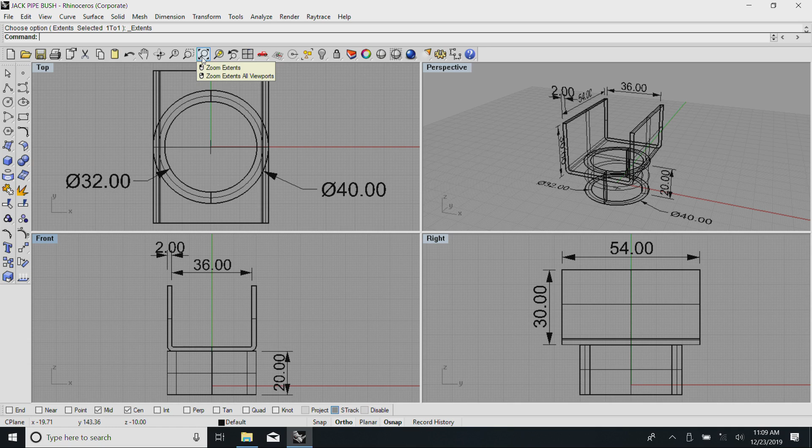that you will notice this probably makes sense only when you are making a very large number of items, where you need to make a blank first of all, which is the developed length. In the earlier lecture, if you remember, I had covered a 30 mm limb here, then a 36 mm limb here and a 30 mm limb here. So approximately a little less than 100 mm, and I started with 50 mm.

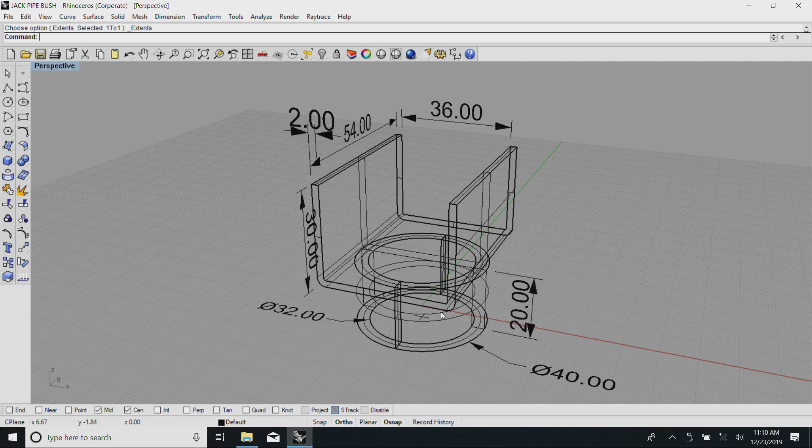So, if you start with a 50 by 100 blank, it is possible for you to form it into this shape, either by using the folding machine, or some other production systems. And at the base you notice that this one is actually a circular portion, probably a pipe. This is typically a 1¼ inch ID pipe at the bottom.

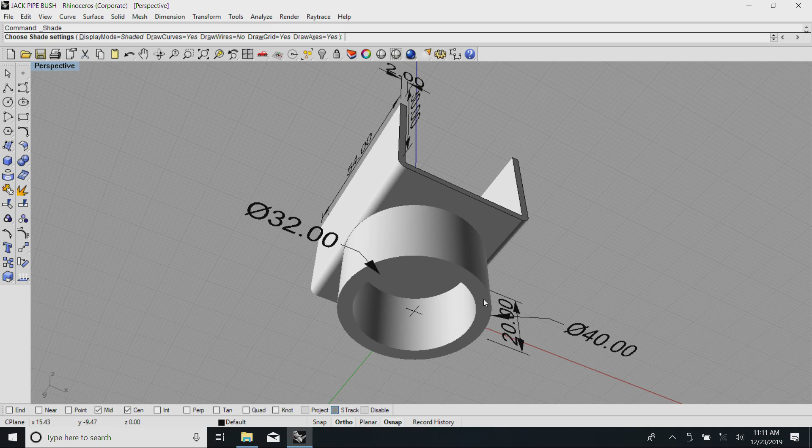That is where these things come into picture. And depending on the type of the gauge, you generally have thick tubes available. So it is possible for us to take one of these hollow tubes and just cut it to length, or alternatively part it. Parting is a way of taking a long tube and making it into small pieces, and then by some mechanism weld these two things together. You just need to weld them here. So, for welding we need a little bit of area.

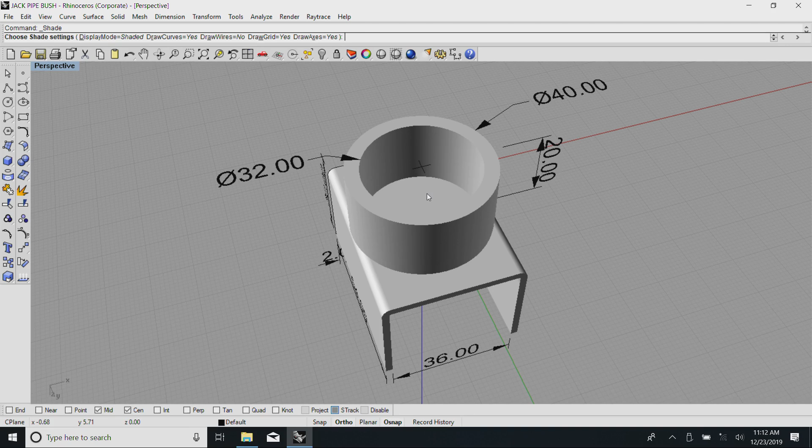Incidentally, my concept was that anything we insert here automatically stops there and still permits you to move things around. And similarly here I can vary the depth as I please without wasting too much material. Similarly, I can vary the width also. Once I do all this, I have a perfect piece which fits on top of the jack, which I am going to come back to and show here.

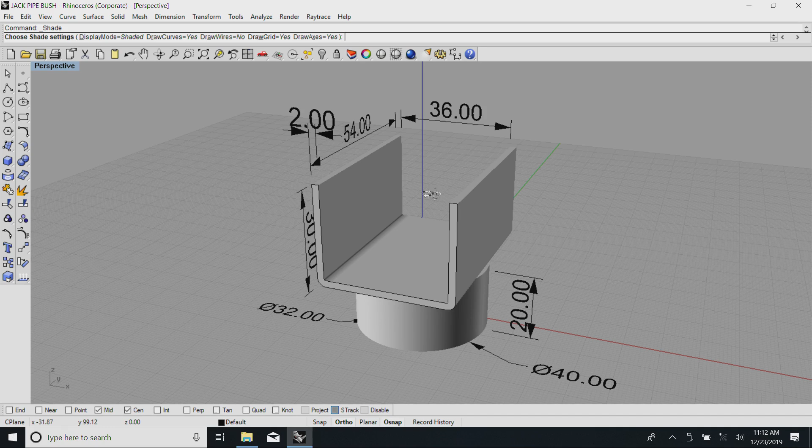However, when we took it to our fabrication facility, one of the things they pointed out was that for a one-off job it is very complicated, and really this does not require this much setting up and looking for materials. Instead, somebody looked at it from the top, and once they did, they found out all we require is a raw material, which is typically a block of

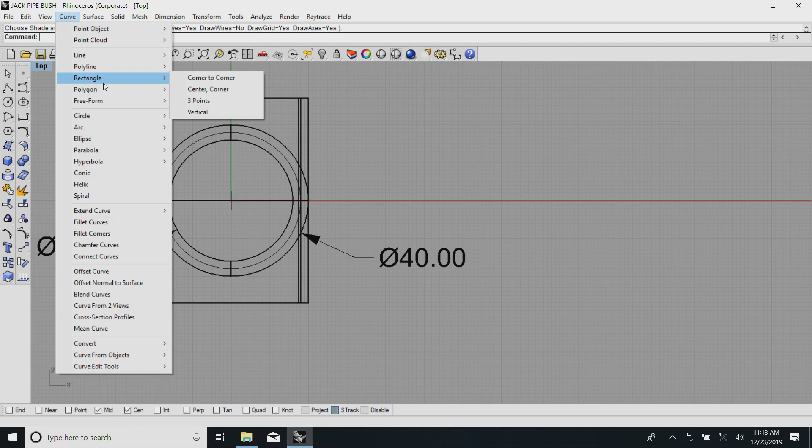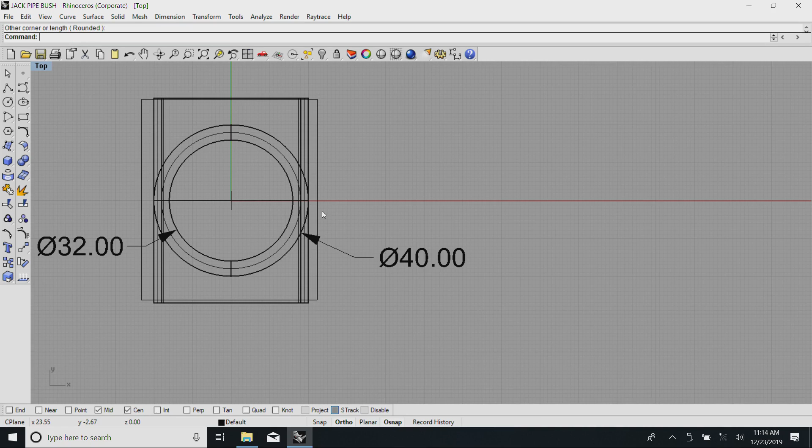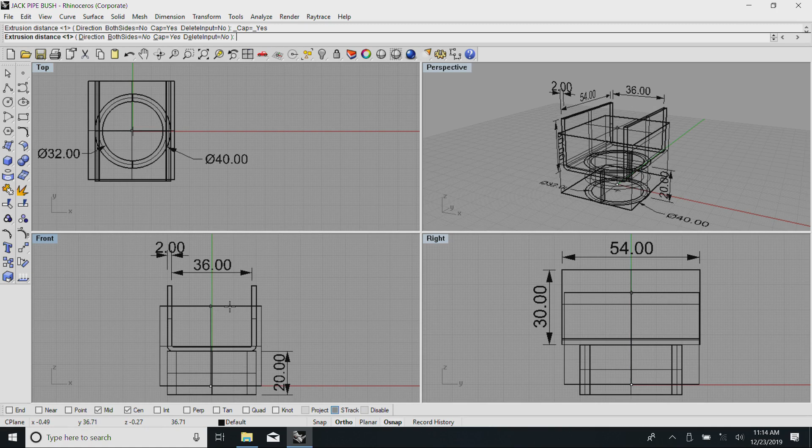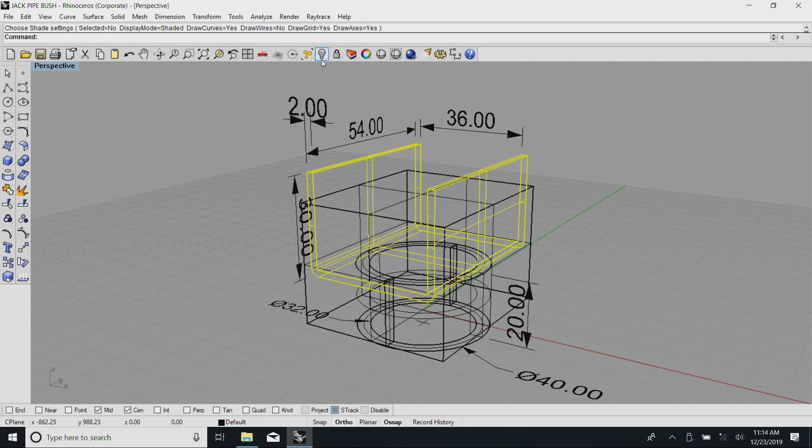so they searched around and found something which typically looks like this here. Now, typically in solid modeling steps, I take a thing like this and extrude it. You see here where I have landed up finally. I just have a solid block, and all I need to do now is forget about the piece which was made earlier, since it is redundant.

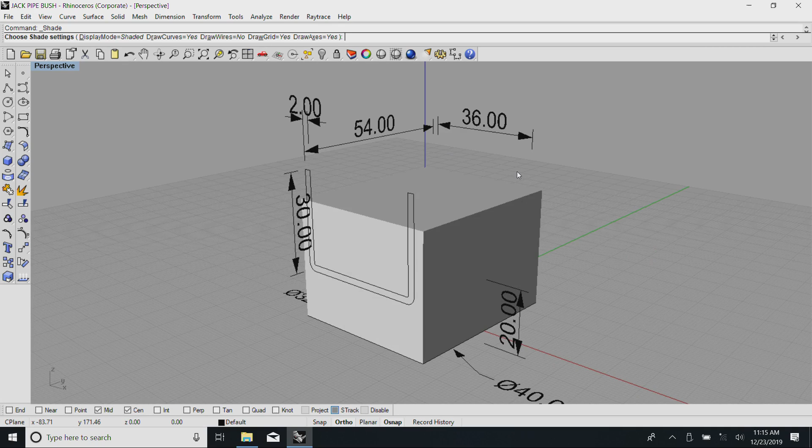I have this nice block. This has been suggested by my colleague in the machine shop, and they said it is very easy: I just take this block, then use the dimensions which I have already supplied. See here, I have a 36 mm groove that needs to be cut through that,

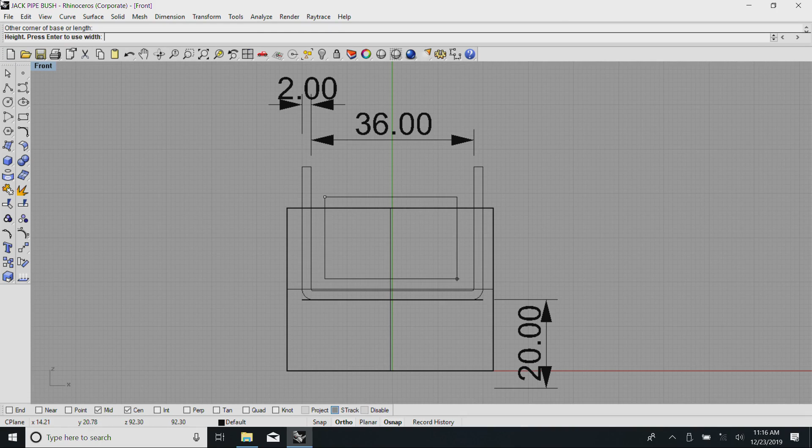and then actually on measurement it has been found that what I assumed would be a 1 3/8 inch chassis member turned out to be actually a little smaller than that. I will measure the thing and show you, finish the job. So, what they have done instead, they have created one beautiful solid; on measurement they found out that the dimensions I have given have a small issue.

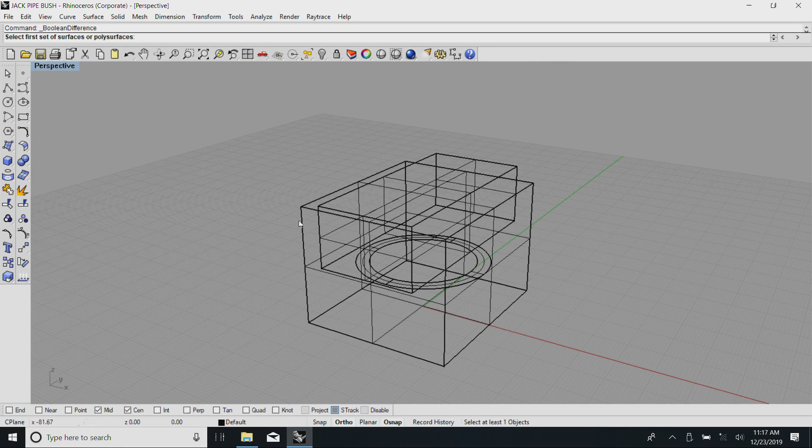You have seen here, I am not making it to scale as of now. I will just show you the operation, which is very similar to what one can do. See, I have made a groove by using a very old shaping machine. Alternatively, I can use a milling machine. Okay, we will just see it here. Take this block and just mill it across like this.

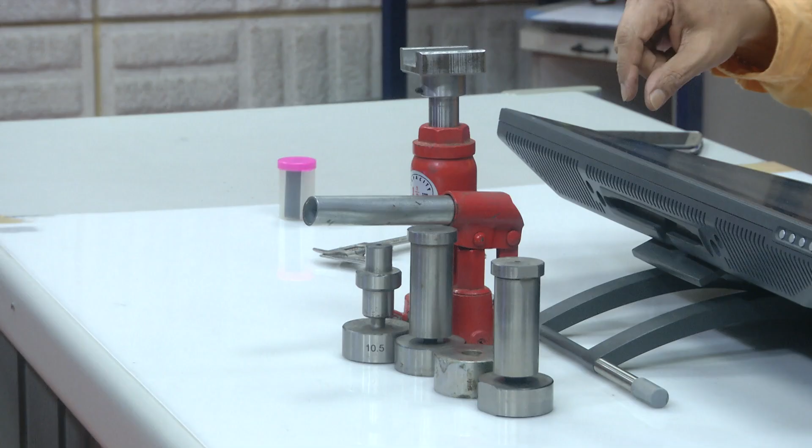Can you see it here? This is the piece which they have made. They have just taken this block which I have shown you there and milled off this portion, and on checking they found out that, considering the stock material and the amount of groove required, something was a shortcoming in my conceptualization: the depth required to prevent it from slipping need not have been so big as I have shown there. So, they checked with all the available milling cutters and passed a milling cutter in about 4 or 5 passes to get the groove.

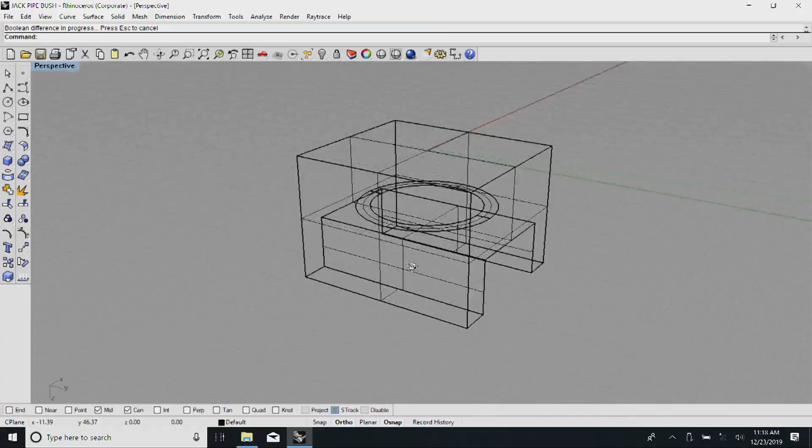I feel it is an extremely brilliant solution to my concept. Now it is my turn; I need to upgrade my drawing to whatever is shown here. Now, coming to the other side, I will just lift it a little. Can you see there is a small hole there, and the hole is part of the very convenient processing that they could do. Now, coming back to my solid model here, I will now turn it over to this other side one more time.

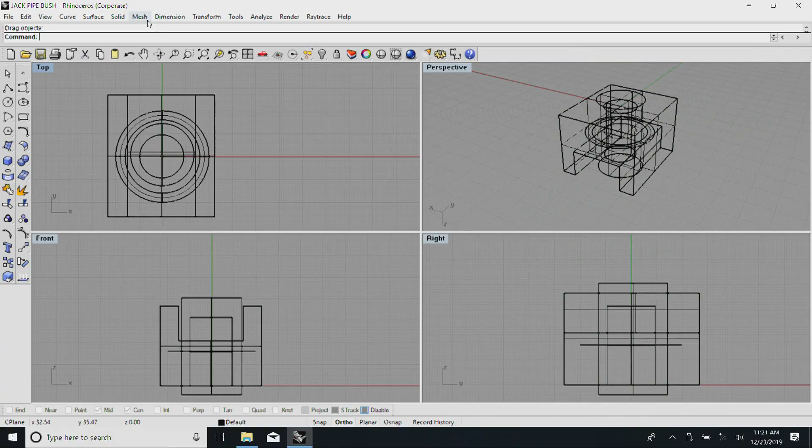I have 2 solids now: one is the block which I started with, and 2 more cylinders which are used to bore a hole or drill a hole through it, depending on the type of machines available. Luckily, they could find a machine which is used for initial operations. So, using that they made a hole here first. If you see the solid here, they drilled a hole through the available material,

using a drill bit which is just about sufficient for it to pass through, but smaller than the plunger of the jack which has to go inside. The advantage of this is, first of all, a lot of closed end mill operation has been avoided, and a drill can easily start with these thick materials. You can fairly easily start with a 6 mm or 8 mm drill, and in the second operation they can drill through the hole. That is how the hole shown there has come about. Now, after this,

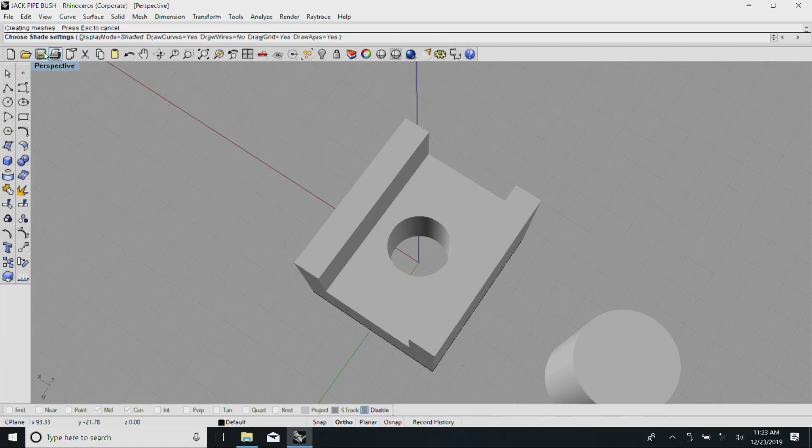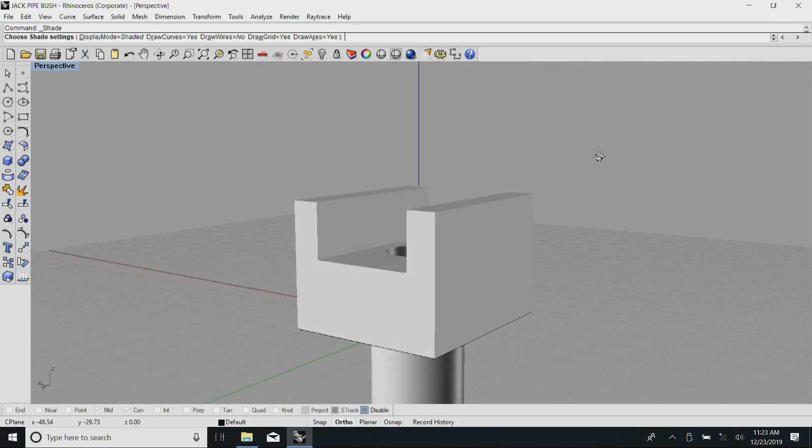see here, this is the second operation which has to be done a little more accurately. You see here, I have my beautiful job ready. Compared to what I started with, this is much easier, and probably, instead of having that sheet metal and one more bush which needs to be parted, I can use this model directly to make a few hundred pieces.

Instead of buying a tube, instead of buying this, since most of these are sold by various weights, I can now optimize it such that making a few other things is much easier and much more convenient at this point. So, you see here I have my job, this is exactly what they could do. It is a far superior design than what I have thought about. I am happy for it, fits perfectly, and there is an automatic stopper.

And overall, while this has been made using a mild steel profile, probably it can be done in a simple non-ferrous gravity casting, and in that case probably no further operation is required, because at this point anything sits here comfortably in it. At this point probably a little bit of passing a drill, which even cleans this hole, is all that is required. A little bit of flash may be there.

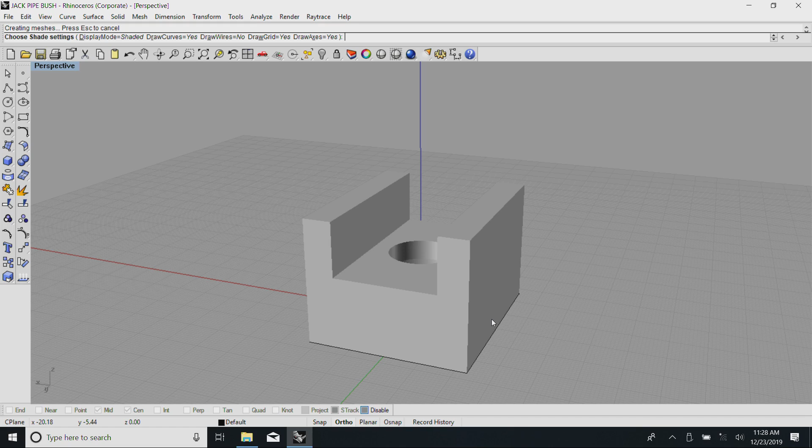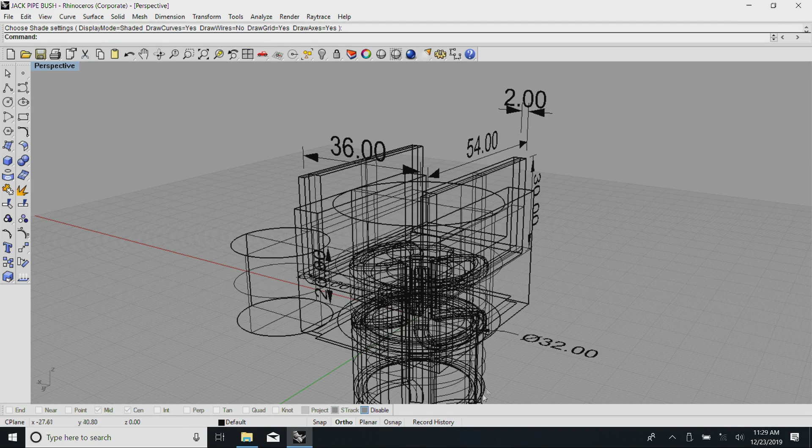If you see that drawing very carefully, I started with whatever you see here, so much of this stuff is still hiding inside. Both of these are sitting one on top of the other. I have so many variants sitting on this. Now, I clean up the whole drawing and we really have two variants of the parts. All possible variants have been worked out here, and it is just very easy for me. All this garbage which I have put is no longer required. I just delete these things which I do not need.

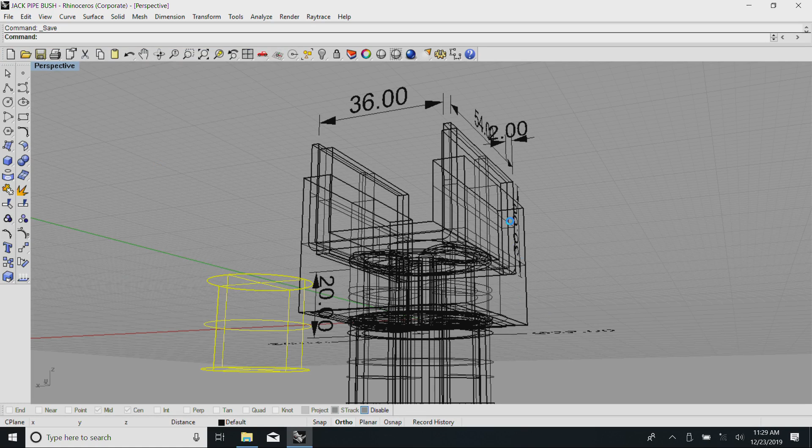Just retain whatever was fabricated in the shop, and so I have two variants of it. One is my concept which I tried to improve marginally, which can always be kept on file, and I have this finally fabricated drawing, which is very easy. So, let us say it is a part of some electric vehicle jack at the bottom, I probably require only one or two of these things. Now comes the further advantage.

If I just carry this along with my toolbox inside the vehicle, most of these jacks already come with standard dimensions. You see here, this is probably a 1-inch plunger which goes there. I just need to carry this adapter, and it is part of my toolbox. In the unlikely case of my needing it, all I need is this: I put it on top of any 1-inch jack, put it on top of the plunger, and it is working.

I feel this is one way which most of the people do when things go in small quantities. When very large quantities are involved, of course, they pass it on to the process people. Having done this, now I need to further talk about other things here.

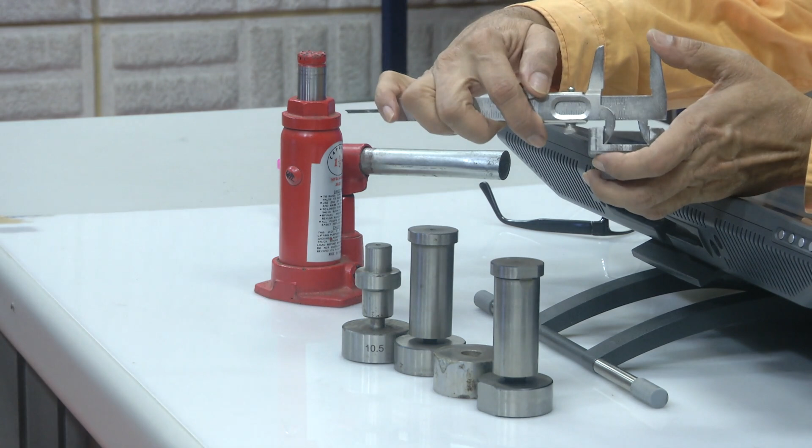If you see here, this is a vernier. Sir, show the side of this thing. See, I need to now spend a lot of effort in finding out what should be the correct dimension, what should be the total length of engagement, what should be the dimension here, and what are the clearances we give such that it sits comfortably.

Okay. Then another important thing, which was required for us, is I completely missed the requirement for a small grub screw there. That grub screw has multiple things. One of them is it will prevent this from coming off. There is a small change in dimensions here. So, if I tighten the grub screw, it will see that it can't come out easily. Secondly, see, now it does not come out. This orientation also, depending on the way we want, we can easily fix the orientation.

So, by adding all this small detailing, now I am much more prepared for the job, which is 100% true. Now, somebody can take my file and go and work with it. Now, coming here again, you will notice the way this is fitted to this; the amount of gap that is required is where your limits and fits and tolerances will come.

Now, I will move to what looks like a mundane thing. Say this is a round circular piece; I do not even know what it is, except that it looks like a weight. Probably it is part of some dumbbells or something like that, which will come to genuine real life problems. This is called a punch and die.

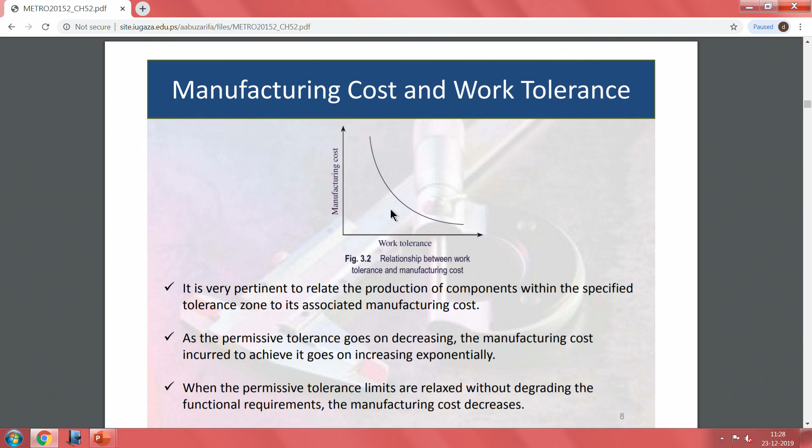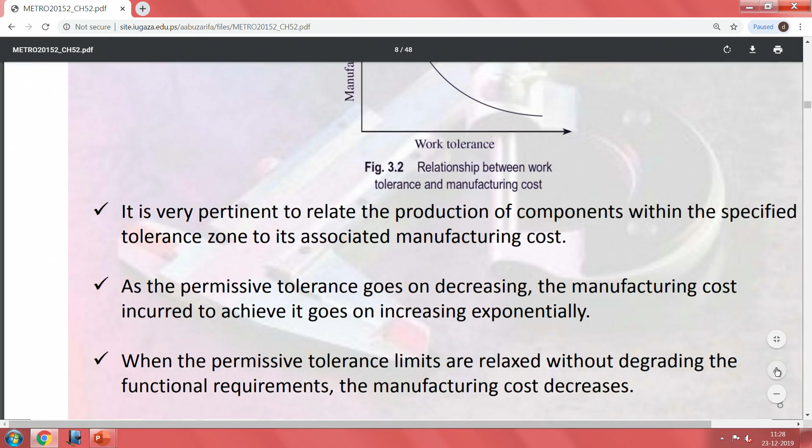This manufacturing cost and work tolerance is very important. Seen here, the manufacturing cost keeps going up if you want parts with closer and closer tolerances. There are ways to overcome that, but still the important thing is written here. The operative concept is: when the permissive tolerance limits are relaxed without degrading functional requirement. The important thing is functional requirements.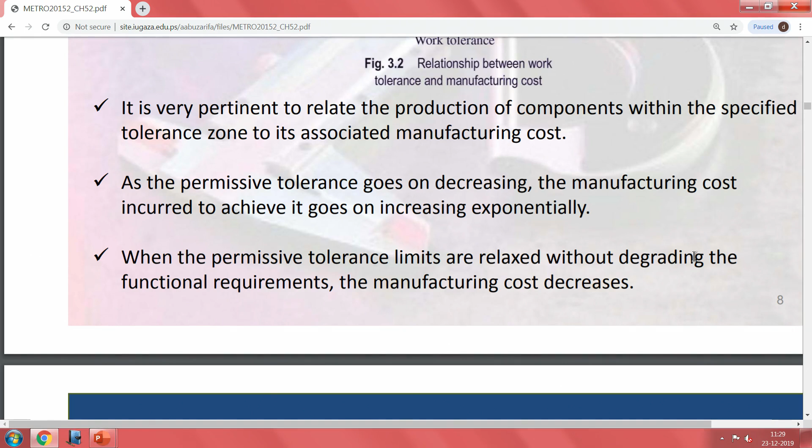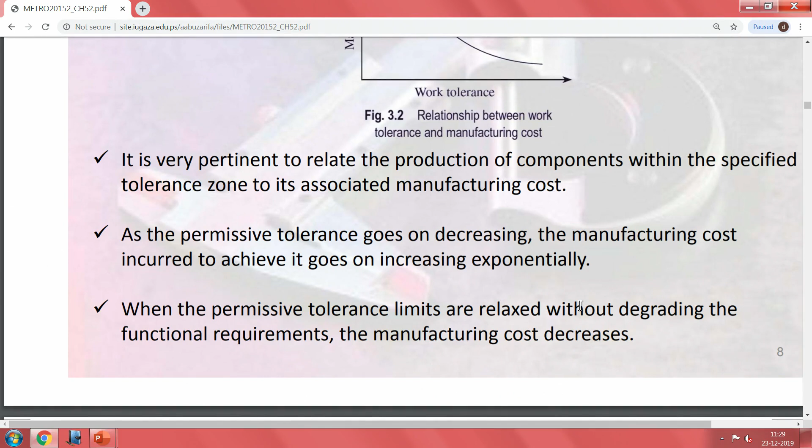This is where the designer makes his own gift of judgment, saying where we concentrate and give very close tolerances, and where we can permit relatively loose tolerances by which we can achieve a lower manufacturing cost. If you keep tolerances lower and lower, you end up with a ridiculous manufacturing cost that goes on increasing exponentially. The problem is the slope keeps on increasing, a very terrible way of doing it.

So, there are two ways: you can specify things which have a loose tolerance, but then functionality will be compromised, or analyze what is creating all these variations and try to control the process. A lot of them may be because of wrong holding of the job, a lot of them may be tool wear, and instead of waiting to observe a variation in the finished part, after a specified number of operations remove it, mount a new tool, inspect the older tool and then start reworking or sending it for other things. So, process improvement is part of the game here.

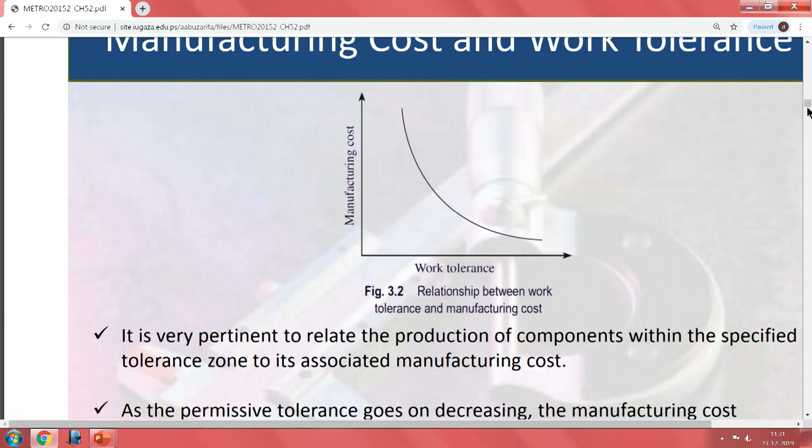And why am I talking to you about this when the subject is making prototypes? Because whatever costs are incurred here eventually reflect in your prototype, and if you tend to ignore them, in the final product prices keep going up. And if you stick to standard or accepted norms in the industry, chances are you will come out extremely well. Now, see what our next slide says. This is already covered.

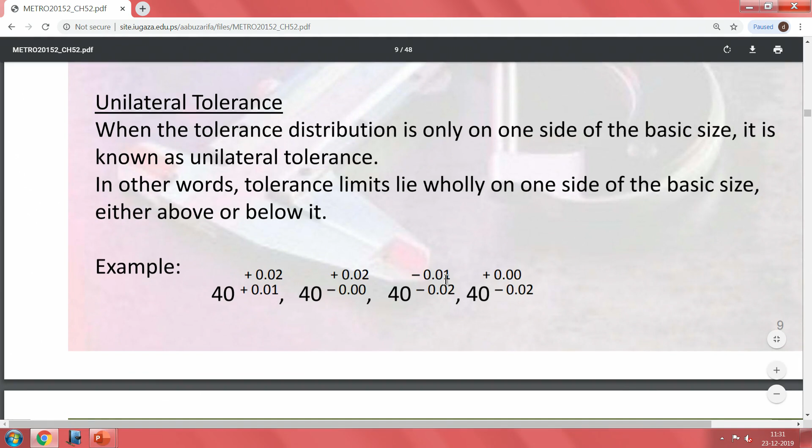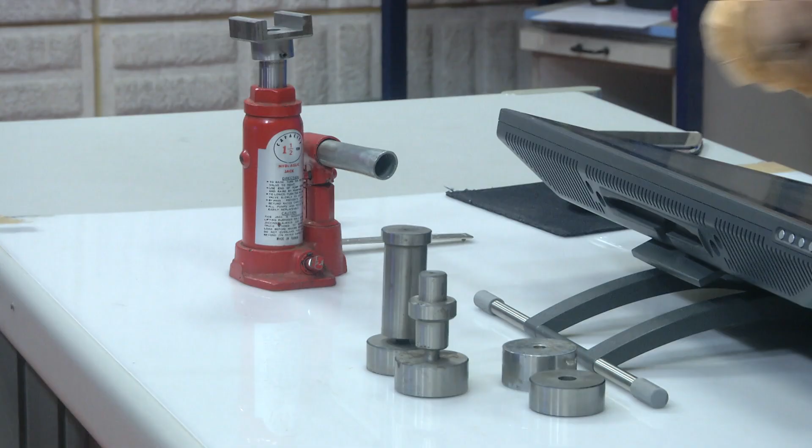If you remember compound tolerance, geometric, unilateral and all this, this is where I wanted to tell you, in the case of that punch and die also, in one of them the basic punch has 12 mm marked on it, and the die has 12.32 marked on it. So, this is fully based on this type of thing. The other is a directly nominal system, by which somebody already has calculated all these things.

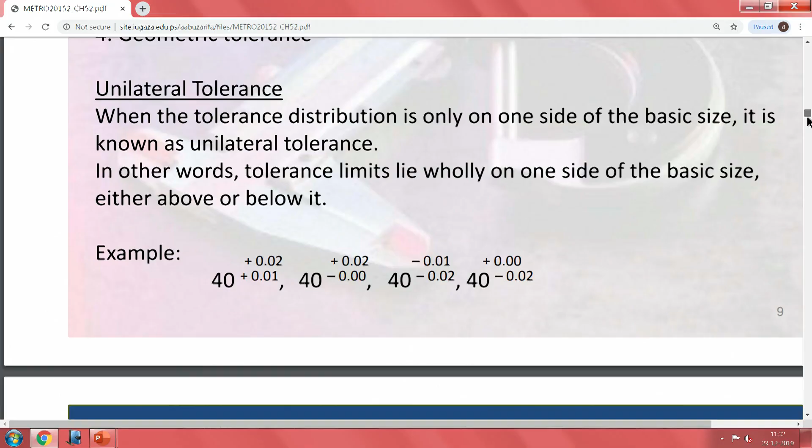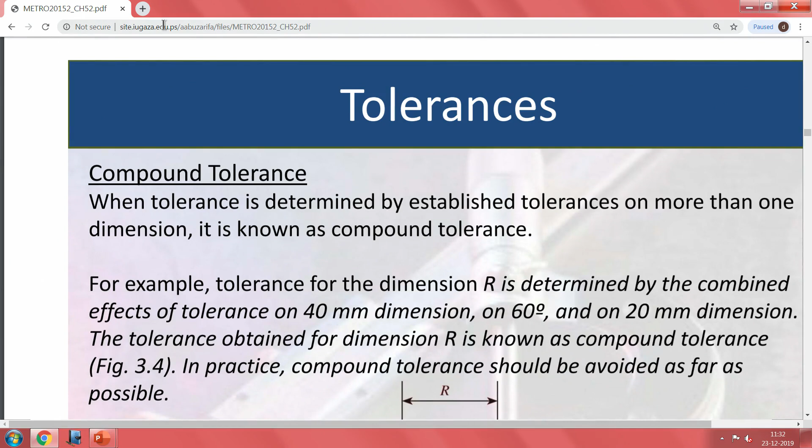So, if you come back to this main designation here, you will notice this same thing, which is a repetition of whatever I have been telling you about. So, my suggestion is go to the website that is mentioned there, and then try to improve what all you can do.

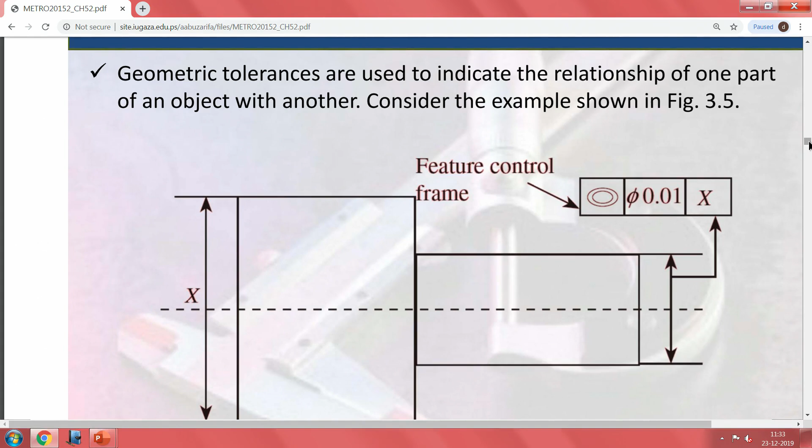Now, you see here there is something else which is mentioned here. Everything including ovality of the job, whether it should be allowed to be oval, and within what level, and some other items mentioned here. So, you have things like form, orientation, positional, so many of these things, accumulation of tolerances, which is

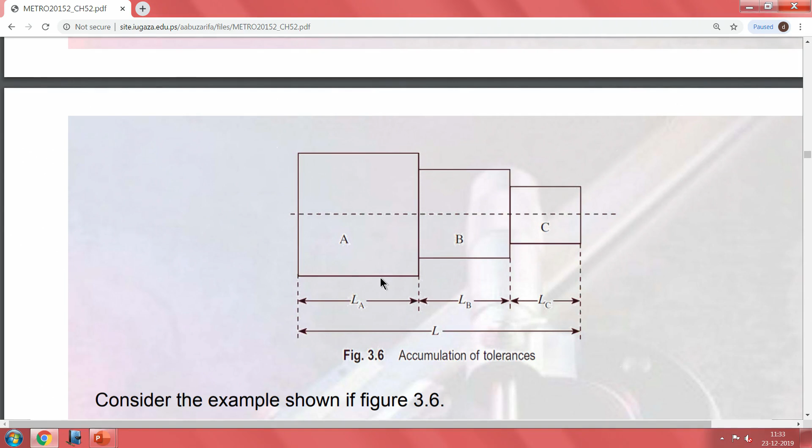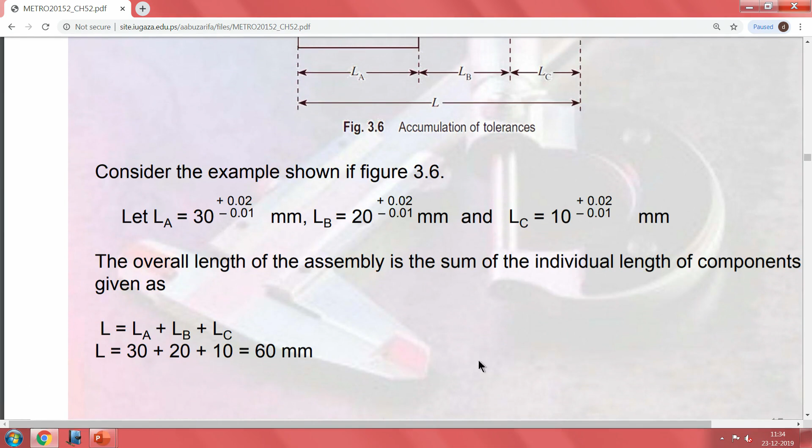also very important. Sometimes what will happen is, if let us say you allow 0.1 millimeter here, plus 0.1 here and plus 0.1 here, total ends up with 0.3 millimeters, and similarly it may come down to the basic minus 0.3 millimeters. So, is it allowed, or how do you take care of these things? You have seen this here, in 60 mm you have ended up with an assembled length which could be 60 microns more and less than

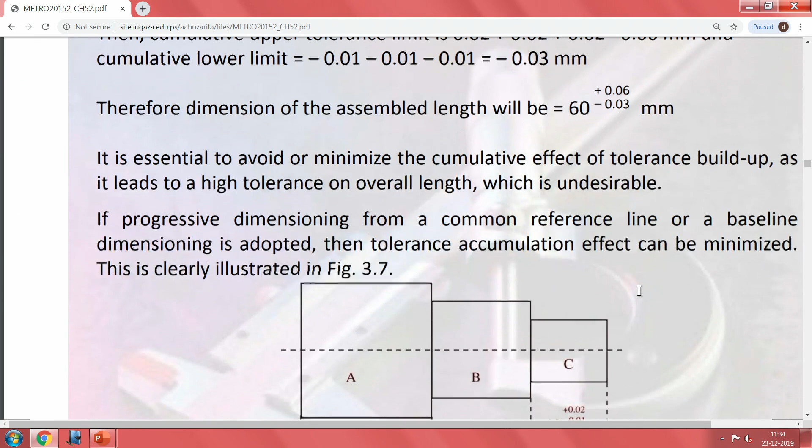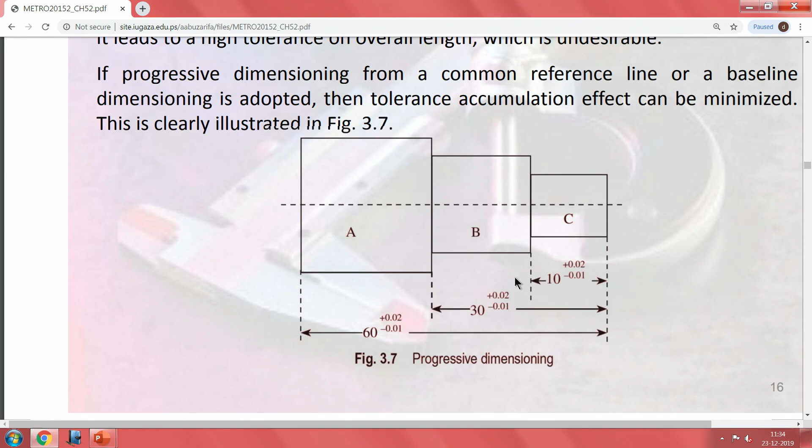this thing. So, what is typically done is, one of the things is left or they are equally divided to make sure that such a thing does not occur. And here instead you see what they have done, they have made progressive dimensions, saying from here to here it should follow this, from here to here it should follow this. And if you see here, it is 20 microns, here it is 20 and it is also 20 like that. So, as you progress these things, a small amount can be kept under control.

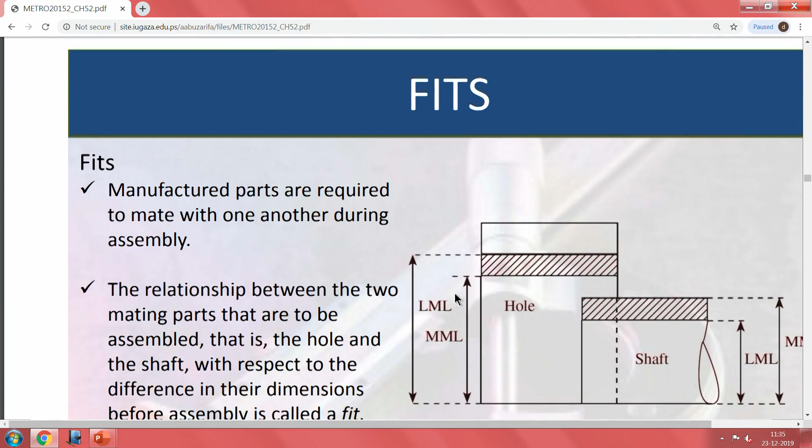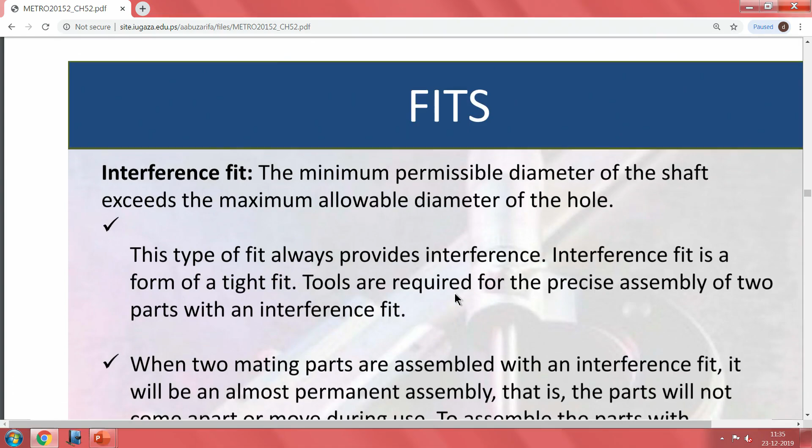So, when you get a chance, try to read as best you can, saying we have the hole basis system, then we have the, this is a standard. I just found something which is useful. It is called IUGAZA dot EDU. Okay. So, we have a beautiful website which shows anything you need about it.

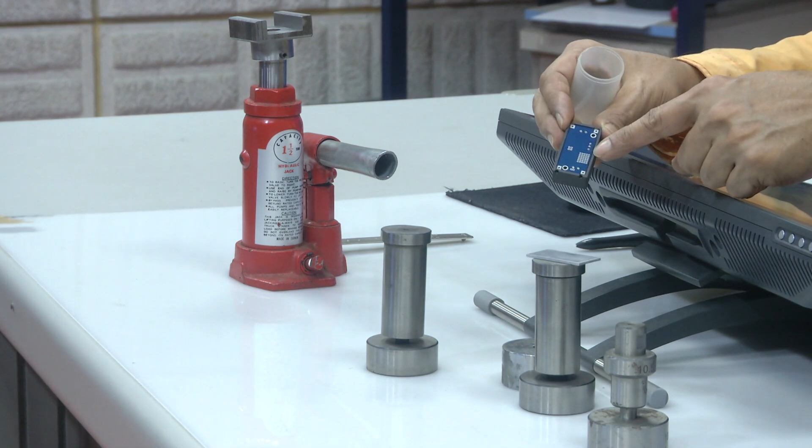this one is a through hole metallized via which is used as a thermal via. That thermal via touches this plate and there is a further insulating coating, and after that when I assemble it like this, even if I pot it, I have a perfectly working unit. I think it is a buck converter for taking any standard input, and this particular one was made to connect to a battery which while charging is 14.5 volts, and the output typically is 12 volts. Very rarely it falls below that, and in the unlikely case of it falling below 12, this loses about 1 volt and still it is possible.

So, in this case if you see the clearances, everything has been made very carefully. This printed circuit board is routed, so there is no issue about it. This is done in a 3D printing machine, which typically gives us plus 0.2 mm tolerances without too much of a problem. But why I am saying this: the same model which was used for making this by hand has also been used by running it through the 3D printer and having this job ready. I will continue with this, saying there are some improvements we could do with this.